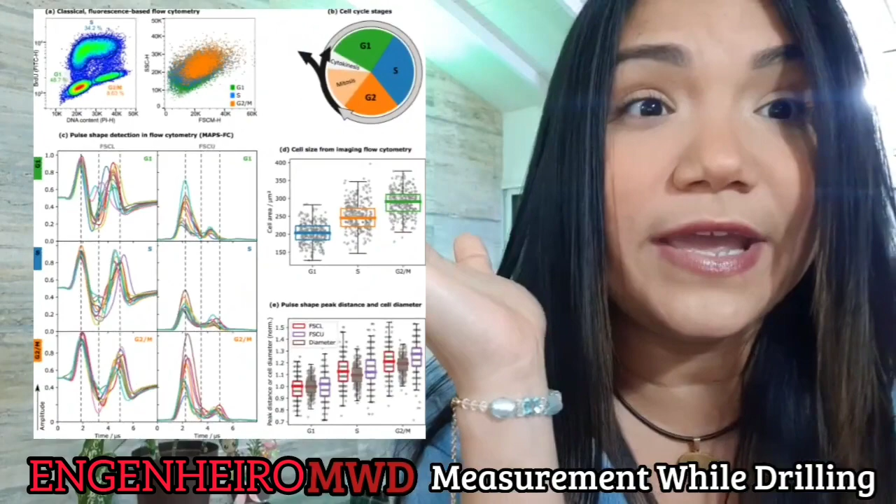In your simple life, they are anywhere. We can imagine them. Pulse flows can occur in many biological and natural phenomena. For example, your heart generates pulse flows when pumping the blood around the body, right? The presence of each pulse ensures that there is enough oxygen and nourishment for your body to work efficiently. So, are they important? Oh, and this is how it works, by the way.

So here's the thing. What is measurement while drilling, or MWD? Well, most people who are working within the drilling industry have heard the term MWD, but what is it exactly and what is its significance? Yes, with advances in directional drilling, it's necessary to know the drill bit coordinates in 3D space during drilling to steer it better and follow the planned well path.

Also, it would be extremely useful to the driller to know the downhole conditions like wear on bit, or the torque and temperature, as well as rock formation properties, to make informed decisions during drilling. All of these measurements should happen while drilling, and that explains where MWD comes from. But how is it done?

The main challenge is how to transfer all the data from downhole to surface. So we can put a package of sensors in the drill string, but there is no wire, okay? This is the most important. So the question is how to achieve this. Like every challenge, engineers have to come up with innovative solutions. Let's list what we've got downhole: drill pipe, drilling mud, and rock formation.

Interestingly, there is an MWD technique developed using each of these mediums, namely acoustic, mud pulse, and electromagnetic wave telemetry respectively. Recently, wired drill pipes have been introduced to the industry, but there is still scope. Its application is limited because it's so expensive, okay?

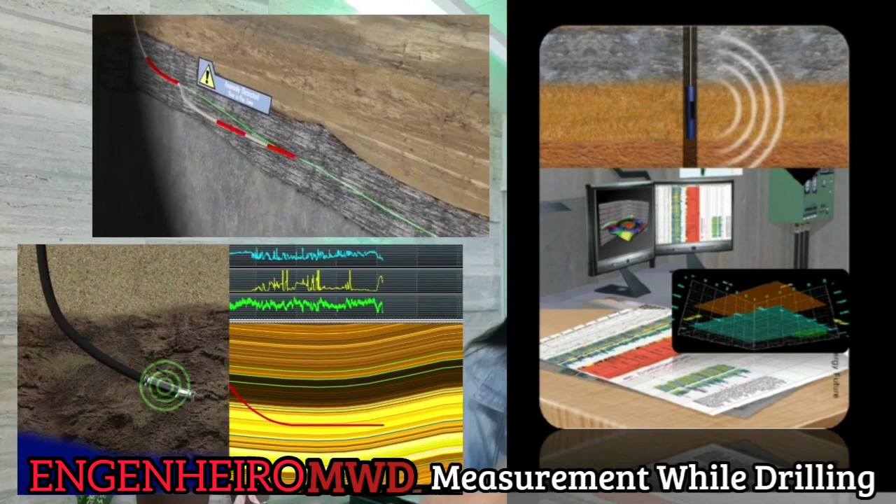So the key to all of these approaches is to encode the required measured data into pulse waves in the form of acoustic, fluid pressure pulse, or electromagnetic wave, and send them to the surface where a decoder converts all the pulse data to meaningful numbers, okay? So all of these methods possess their unique shortcomings and strengths. However, mud pulse telemetry is the most popular and least intrusive operationally, and is the focus of this video, okay?

As with any wireless telemetry, the mud pressure pulse telemetry process comprises the following subsystems: downhole measurement system and mud pulser, encoding the downhole measurement data into pressure pulses, and decoding the pressure pulses at surface. It is a beautiful combination of these three that should be aligned to get the data well decoded at surface.

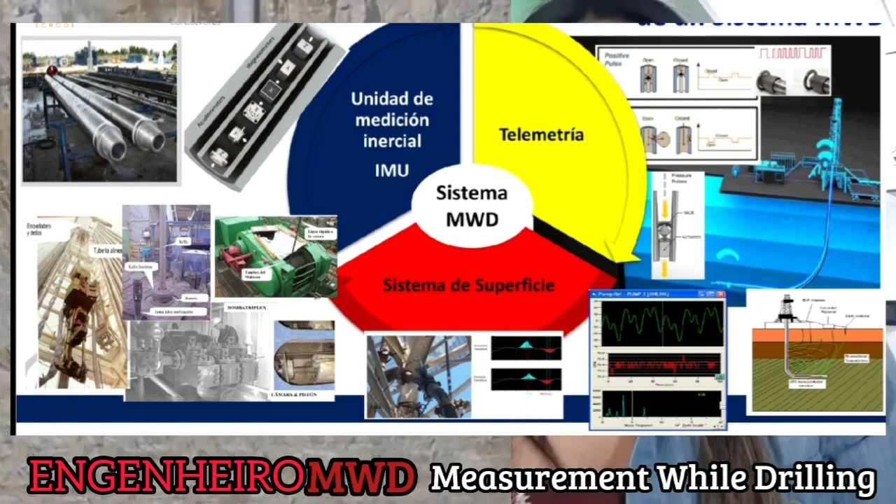And there are a lot of parameters that we need to consider when preparing the tool, when assembling the pulser. We need to know how the drilling mud will be in that section. How are the pumps working, for example? How are the timings when programming tools according to the sensors that you have? There are a lot of things that we need to consider to get these three subsystems to work properly.

Okay, so let's talk a little bit about the MWD tool. The MWD tool is an electromechanical system which consists of a directional sensor package, mud pulse generator, and power source, which can be a battery or turbine generator assembly. The MWD tool assembly is placed in a monel, and a monel is a non-magnetic collar to reduce the interference with magnetometers used for azimuth direction measurement.

The MWD tool is usually placed above the drilling motor. It's usually placed above. Okay, just a second. This is the mud motor, and this is the drill bit. If you have, for example, LWD services, you will need an LWD tool. So this is logging while drilling. This is the mud motor, and this is the drill bit. And here is the MWD. The MWD is above the motor.

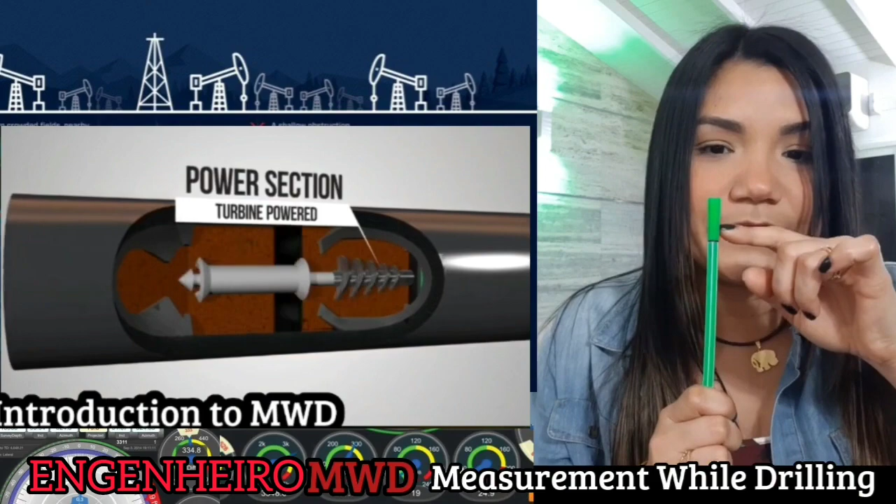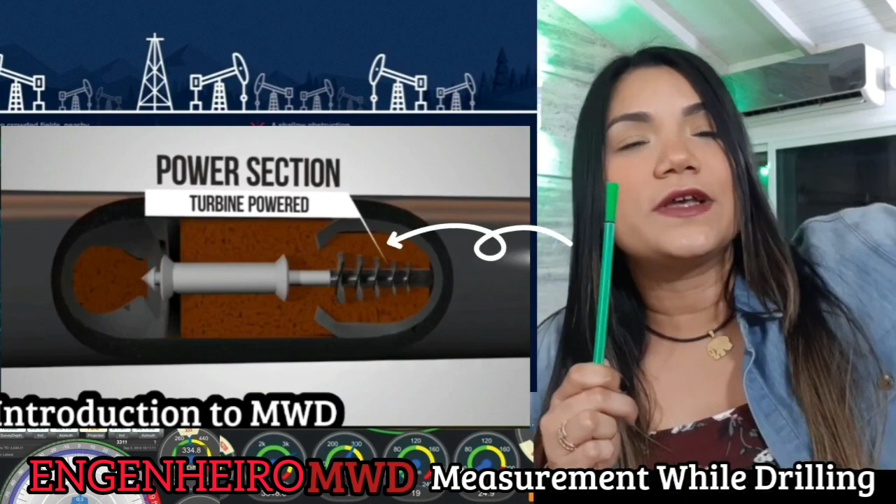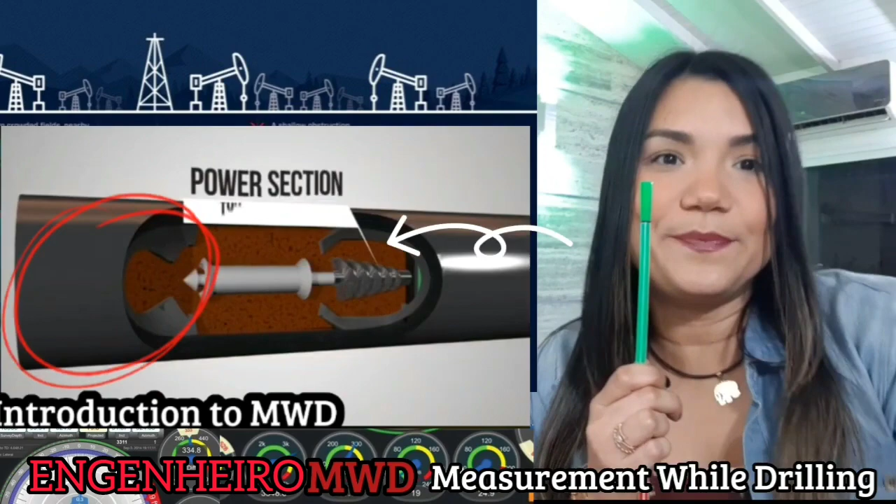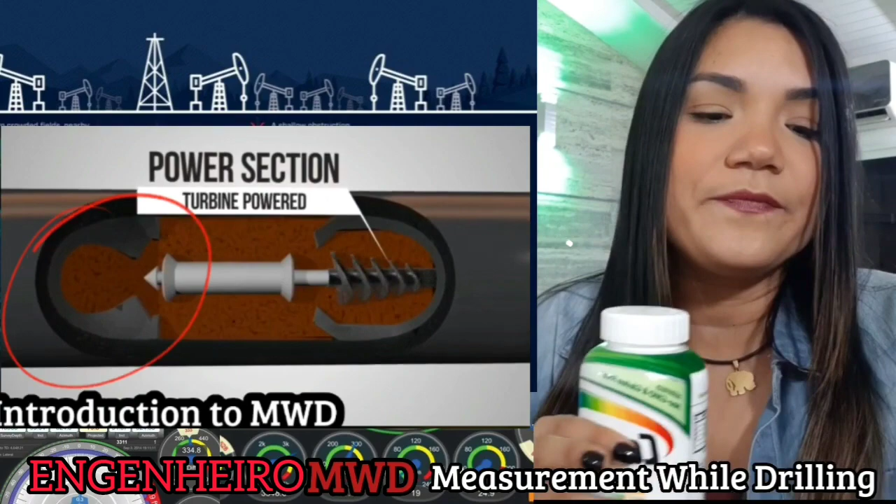Okay, let's imagine that we have the MWD, and here is the pulser, okay? And inside the pulser, there is a poppet, and there is an orifice, just in this part, okay? Imagine that the driller turns on the pumps, so the drilling mud is going to pass through the drill string and flow in this direction. The first thing that the mud flow is going to find is the poppet. Imagine that the poppet is right here in this position, okay? And also there is an orifice. The positive pulse is created, as I told you, when you momentarily restrict the mud flow.

And how is it done? Okay, there is a valve, there is a mechanism, but what really happens is that you have the poppet and the orifice programmed just to close and open, okay? And obviously it's going to pass depending on the drilling section, the formation, your tool. There is a time. The entire flow will pass in this small section. So if you do a change of this pressure by doing this, you're going to create a mud pulse.

When you try to teach this in Spanish, it's easier than when you are trying to do it in another language that is not your own or your mother tongue.

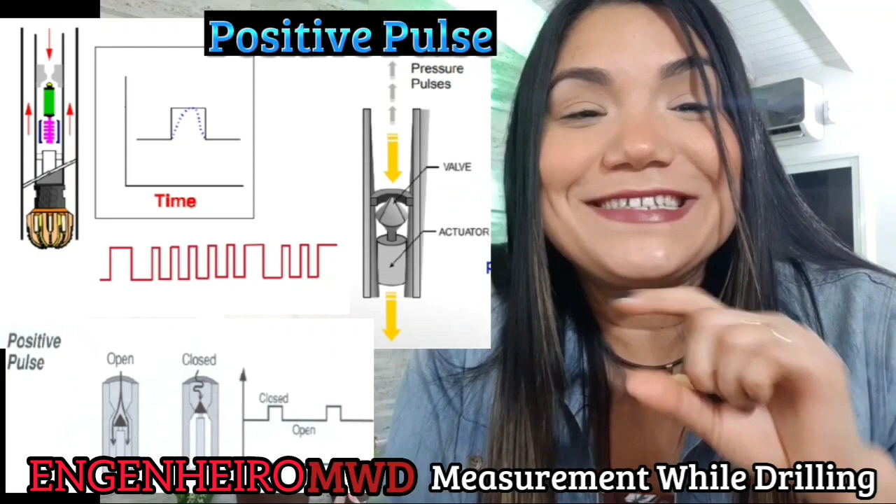So if you have this increase inside your drill string, then it's going to create a mud pulse. And it is positive because it is an increase inside the mud column, okay? This generated pulse wave travels back to the surface, and it is detected by a decoder pressure sensor. This technique is used for telemetry systems which need slow rates of data transmission, okay?

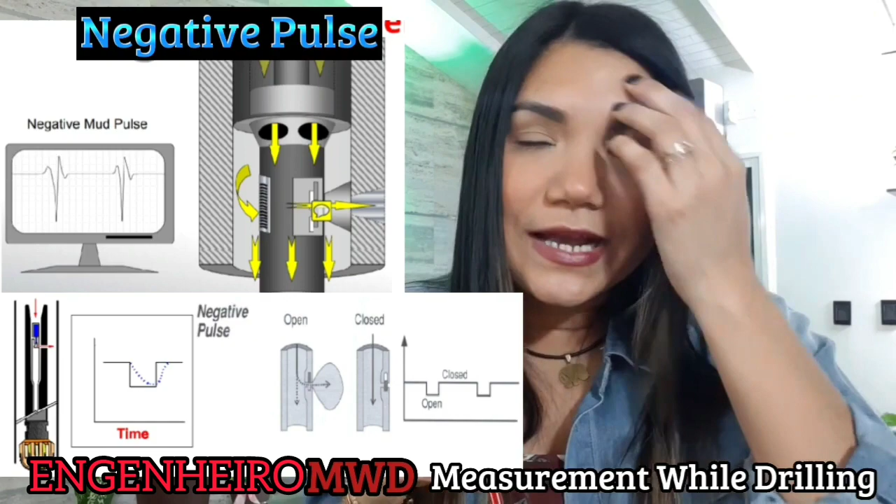And there is another way to generate the mud pulses, the negative pulse. Pulses are generated by venting. Remember that you have your drill string, you have your drill bit, your mud motor, you have your pulser. But in this case, when we talk about the negative pulse, there is a mechanism venting the drilling fluid from the drill string into the annulus. There is a mechanism there that allows the mud flow to go out of the drill string.

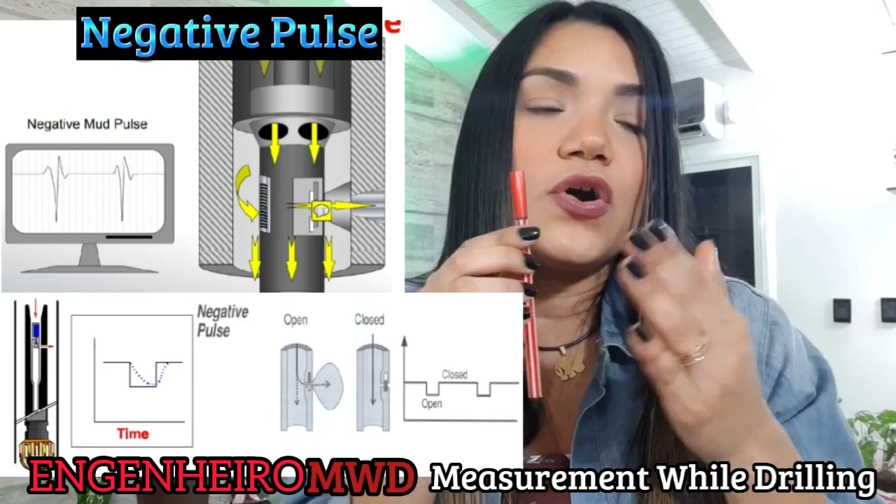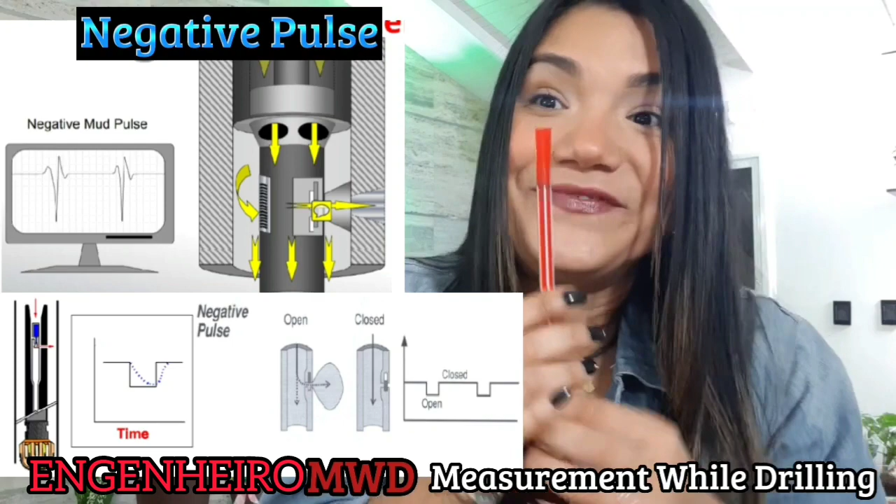Obviously, if you have a venting system inside your drill string, you're going to observe a decrease in your pressure measurement. So mud pressure decreases during venting and the pressure pulse will generate this decrease. I'm going to show you in this picture. I hope it helps. This technique is rarely used in the industry. Well, it's a bit expensive, by the way, but it's an interesting way to have faster data.

And also there is another mechanism, the continuous pulse, okay? So a continuous pressure pulse is created by a rotation of a rotor over a stator. It's called siren, since the principle of its function is similar to the sirens used in ambulances and tornado warning alarms. This technique is used for faster telemetry systems.

Now we have to know how to encode the downhole measurement data on pulses. Okay, the process of encoding downhole data on pulses is called modulation. Have you wondered what FM and AM stand for when tuning to a radio station? They stand for frequency and amplitude modulation respectively, okay? They are different techniques to convert the radio signals, these sounds, to electromagnetic waves broadcasted to our radio receivers.

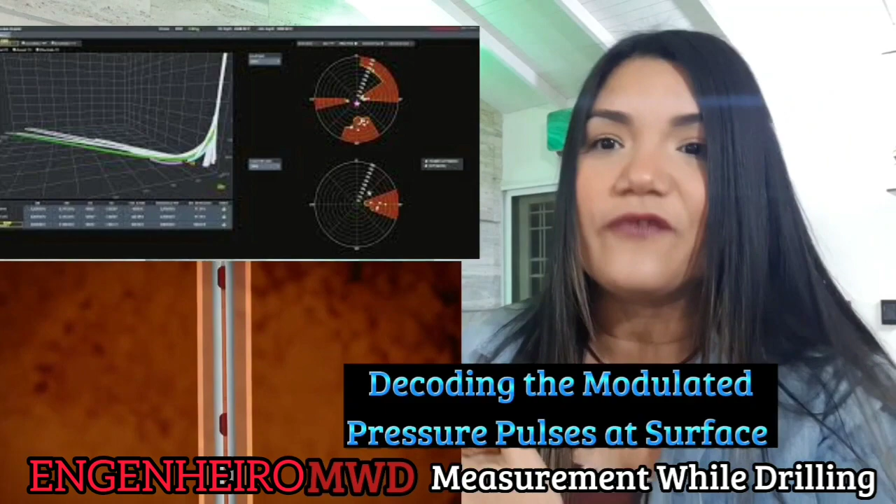Then we need to decode the modulated pressure pulses at surface. The main instruments for decoding the pressure pulses include a pressure sensor and an electronic box, which converts the analog data of pressure pulses to digital data for signal processing. Alright? Due to the existence of noise, mainly from the mud pump at the surface, the generated signal gets filtered, and it is decoded to obtain meaningful engineering numbers for the measured physical parameters. So the process of signal decoding is the reverse of signal encoding, which was explained earlier. The decoded data is displayed in real time on a PC as shown in this picture.

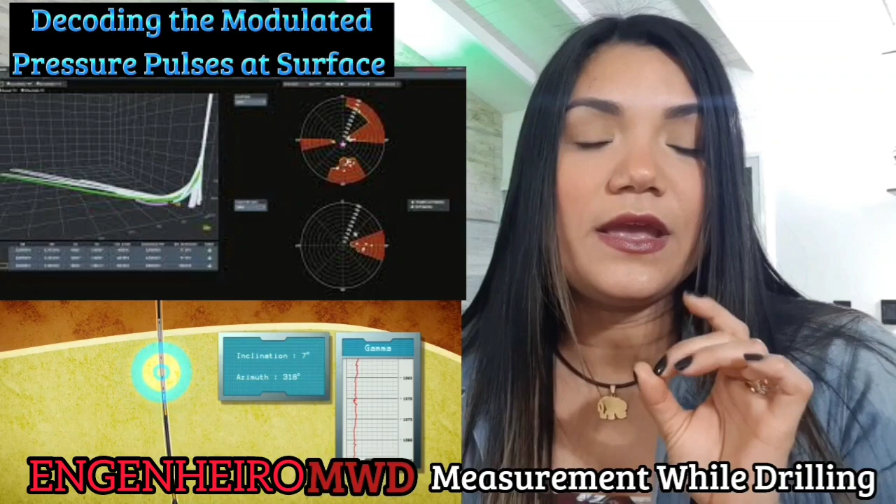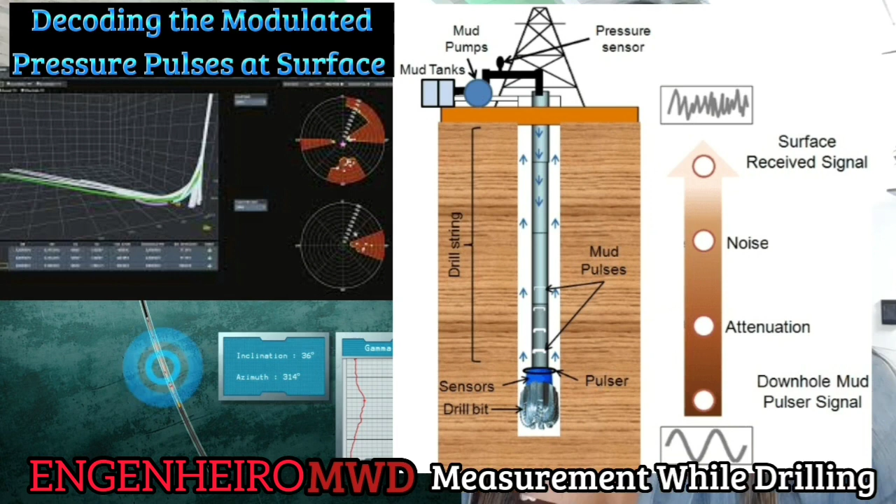There is another thing that is pretty important to be careful about, and this is the pulse wave attenuation. The pressure pulse wave usually travels several thousand feet against mud flow in your string to reach the surface at the speed of sound in the mud, typically 3,000 to 5,000 feet per second. This wave is attenuated as it propagates to the surface by a dissipation factor, okay?

So, is it important to know about mud pulse telemetry? Yeah, we can see that mud pulse telemetry is an essential part of directional drilling services and is a challenging engineering topic. The final goal of this system is to accurately carry the downhole data to the surface, okay? And then the unit is going to convert that digital and analog data to engineering data. Then we are going to transmit that data to the rig floor displays for the driller, to place the well in the right position.

And finally, whether you are with LWD services or not, you're going to deliver a report, your final survey report or your LWD QC logs. So it is important that this data is well transmitted from downhole to surface and well decoded, by the way. So I hope you are more clear about this topic.